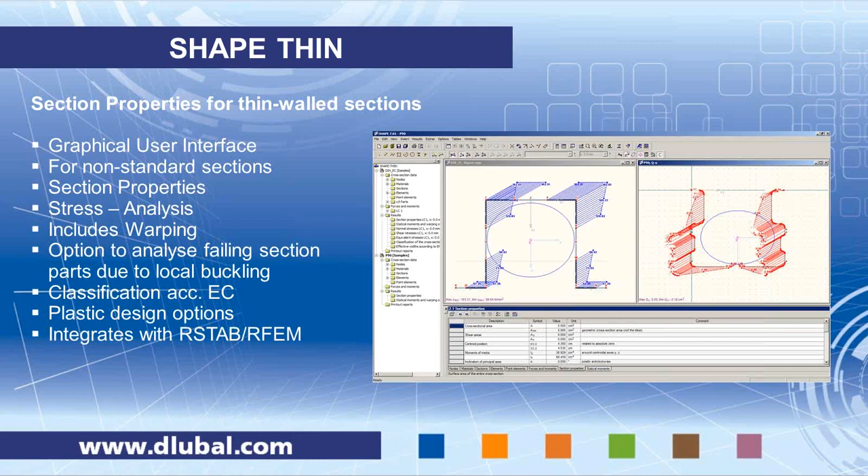ShapeThin also allows you to enter internal forces and to get stress analysis. It includes warping, and it's also capable of checking for local buckling and analyzing the failing section parts on a cross-section. It comes also with a classification according to Eurocode for general cross-sections, and it has plastic design options. It also is capable of importing internal forces from RSTAB, RFEM, or you can, as you like, manually enter some internal forces. We will see this module live, presented by Chelsea in a few minutes.

The second module that we are going to take a look at is RF-FE-LTB. It is meant to do buckling and lateral torsional buckling analysis according to second order theory. It's made from a 7 degree of freedom 1D finite element, which includes warping moments. In general, you find in the codes procedures how to check for stability for standard sections, like for an I section, but once it comes to a general section, there's not many regulations that you can use.

In general, you have to use a program like RF-FE-LTB, where you can set loads eccentric, and that includes the 7th degree of freedom, the warping degree of freedom, and with an imperfection and a theory second order analysis and a stress analysis at the end, you can check for the allowable or limiting stress, and if the critical load factor is smaller or larger than 1.

As I said, it works for all kinds of sections. It allows you to place loads eccentric. Also, it has the option to stabilize a section eccentrically, so you can arrange a support or a spring along the top flange, for example. And it does stability and stress analysis. We will also take a look at this module live.

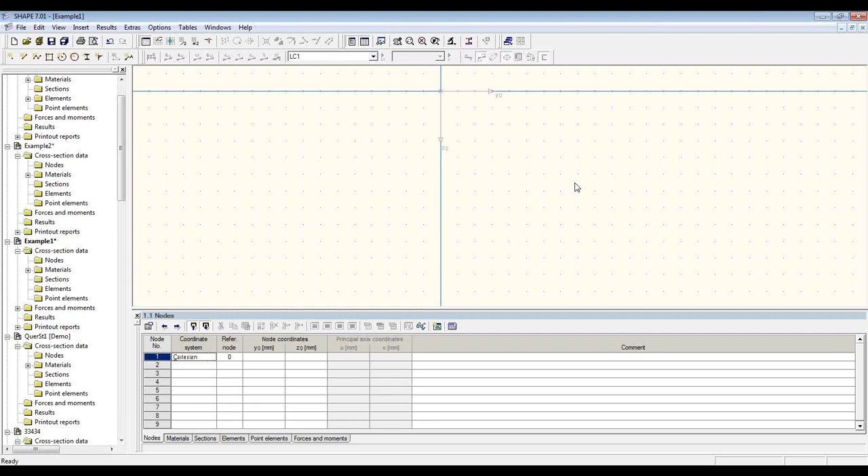Hello, everyone. Thank you once again for joining us today for this webinar. My contribution for today will be an introduction into ShapeThin by going through a couple of examples of modeling and analyzing non-standard sections. If you can see my screen now, I'm in ShapeThin, and the layout of the program is similar to RFEM in that you have a graphical window and workspace.

Below that are tables. To the left here we have a navigator, and at the top there is a toolbar with several tools for modeling and also for displaying the results. So in ShapeThin, when you are creating a new file, you have some options here in this dialog box.

First, you define the name of the section, which is also the file name, and you can also add a description, which will appear in the heading of the printout report.

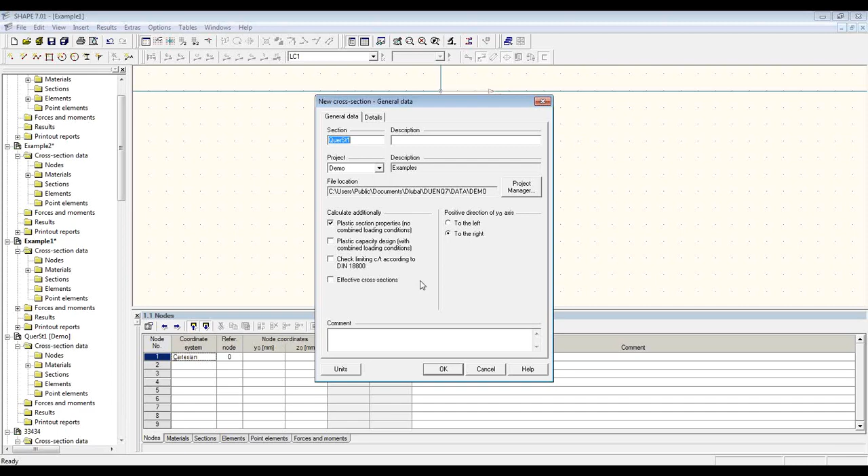Below here, you can see some options for calculation. Here you can define if you would like plastic section properties to be determined. You can also perform plastic design, check limiting ratios according to DIN, and also check or analyze the effective cross-sections. To the right here is just an option where you can define the direction of the global coordinate axis.

Okay, one last thing before I start with my example, I'd like to take a quick look at the project manager. This comes with ShapeThin and is a nice way for you to be able to quickly access and organize all of your files and previous sections that you've created. Here is a preview of my first example I will be creating, and here's a preview of the second one, so you can keep that in mind.

Okay, so getting started here, my first example will be demonstrating one of the ways in which you can create sections in this program, and I'll be making a built-up column section out of standard I sections and then modifying them. I will be creating an opening and modeling some welds.

So first I'll go ahead from the toolbar, open up the cross-section library, and here I can choose my I section for my first part of this. So I'm going to take an IPE 500.

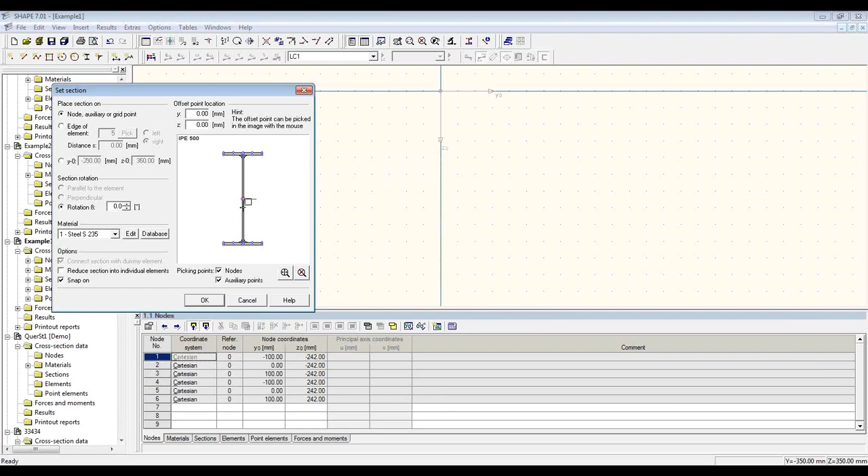And this dialog box that appears is what facilitates you placing the section. So since this is my first one, I can just go ahead and place it so that the top flange is at the center ordinate.

Okay, going back into my cross-section library, I can choose an HEA 220. And here I'll use this section, or this dialog box a little bit more. I want to define a rotation, as if you saw from the preview, I'll have a rotated I section attached to the web. And here is where I define which part of the section I'm deciding my placement by.

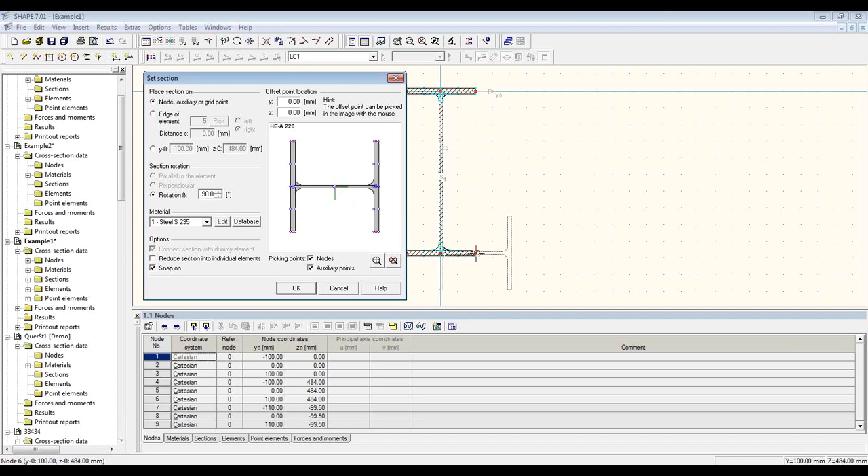So at the moment I have the center one selected, so if I go to the window and pick this node here, the center will be placed there. So first I want to go in and choose the one on the left side, and then, one moment.

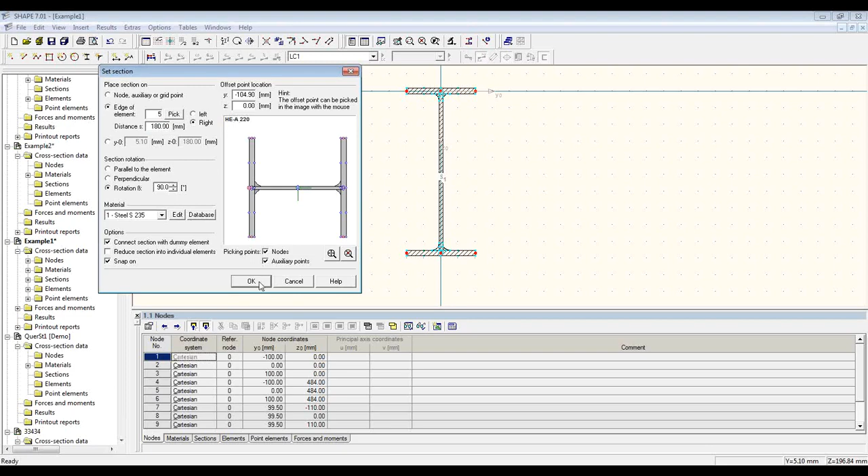Okay. I can go ahead and choose where it's going to be placed on the section that is already been placed. So here I pick the element that I want on the edge on the right side, and so there you can see it's locked on the right side of the web here. And I can just place it in anywhere, or I can select my distance from here. Okay, and hit OK, and there I have it placed.

So now I have two standard sections that can be selected independently. If I would like to show the section details, I can go ahead and display them from this dialog box if you need to reference that at any point.

Okay, so as I said, I'd like to make some modifications, add an opening. In order to do that, I need to be able to select these parts individually. So if I make the selection of the entire element, right-click, and select Reduce Section into Elements. Now I'll show you exactly, letting me know I have 5 elements and 4 point elements.

So here I'll go in, zoom in. You can see that each side of the flanges and the web each make their own element now independently, and the curved parts are point elements as well.

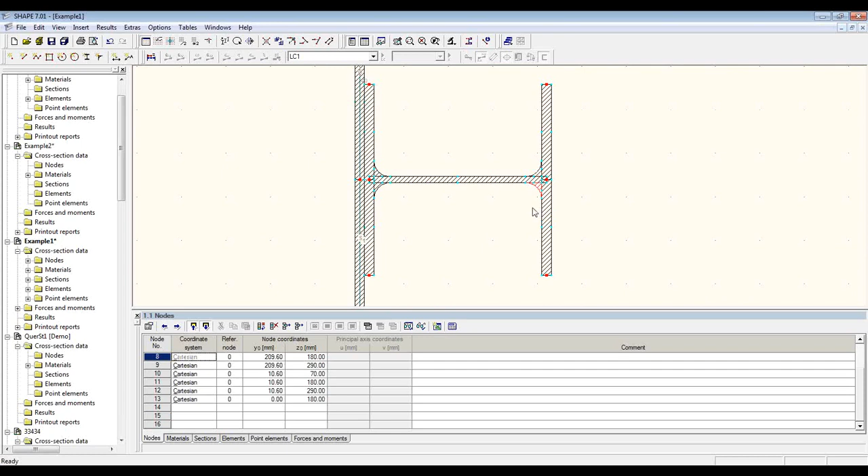So now I can select the web, right-click, and choose to insert an opening. So here, define my width of the opening. I want 30 millimeters, and its location. I want it to be 60 millimeters from the start of the element, which in this case is the right side. So apply, and I have an opening placed.

When an opening is defined, what is put in between is a rigid dummy element. And for our calculation, we have a value called the effective thickness, which is for the shear transfer. The recommended assumed thickness is the average of the thicknesses of the neighboring elements. So in this case, the web here is 7 millimeters, so I'll make the effective thickness 7 millimeters.

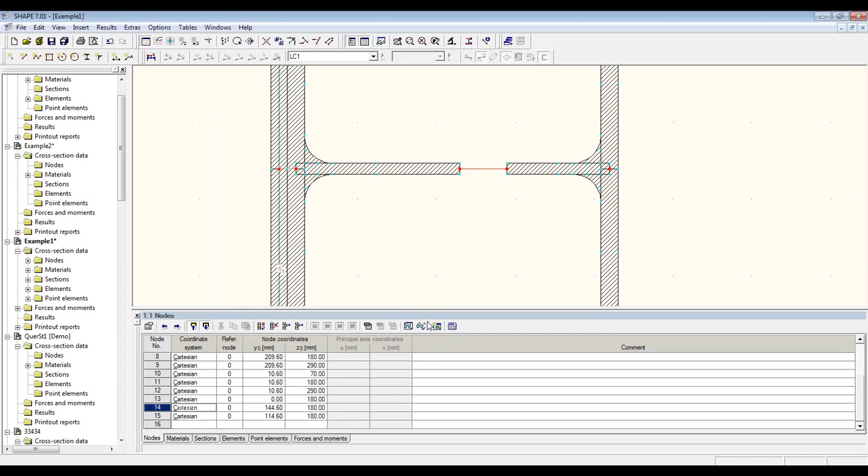Okay, so next I want to model a couple welds at this connection point at the top and bottom. So for that, I'll go back up to the toolbar and select a new point element. And this is ready to go.

I have my radius at 10 millimeters, and then I can select which node I want to place it at, and there I have my weld. If I go up to the top, I can make a rotation, negative 90 degrees, and place the top weld there. So now the area of this weld element will be included in the total cross-sectional area.

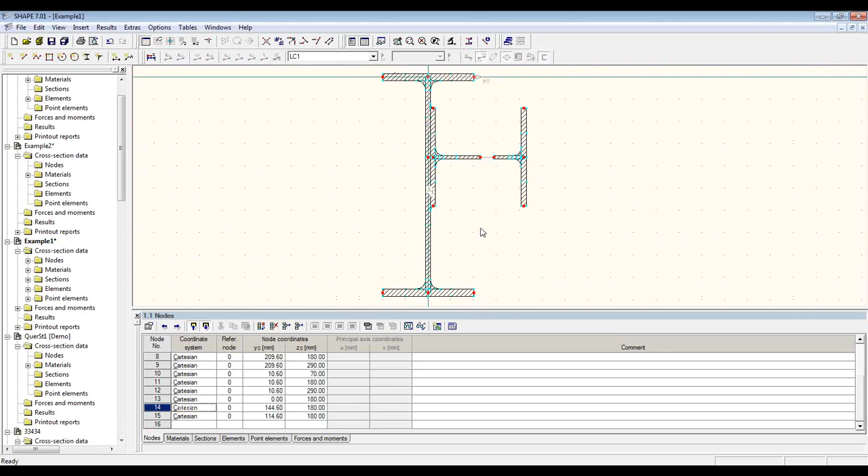Okay, so at this point I have all of my section modeled. What I can do before I do my calculation is a quick plausibility check. With this check, it will find if there are any errors, and if there are, it will tell you exactly what the problem is, so you know what to fix. So, plausibility check, no errors were detected. Okay, now we're ready to run our calculation and get our results.

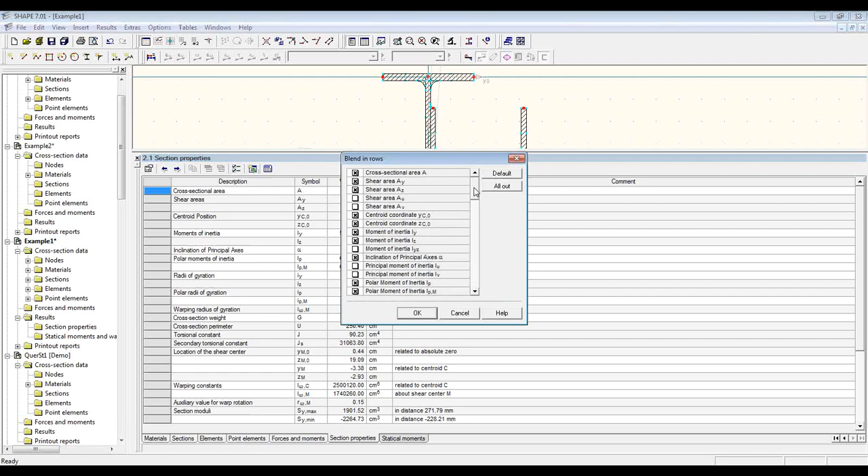Okay, so the first table you see here is the section properties, and here's a list of all the significant section properties that have been determined. You have your shear areas, cross-sectional area, position of the centroid, and so on. You can define what is included in this list by using a filter here, and you can include even more properties as well.

Okay, next table available is the statical moments. This is the numerical results, and these results are also included in your graphical layout. So I'm going to turn this back on, and you can see the statical moments in both directions, your normalized warping ordinate, and also your statical warping statical moment.

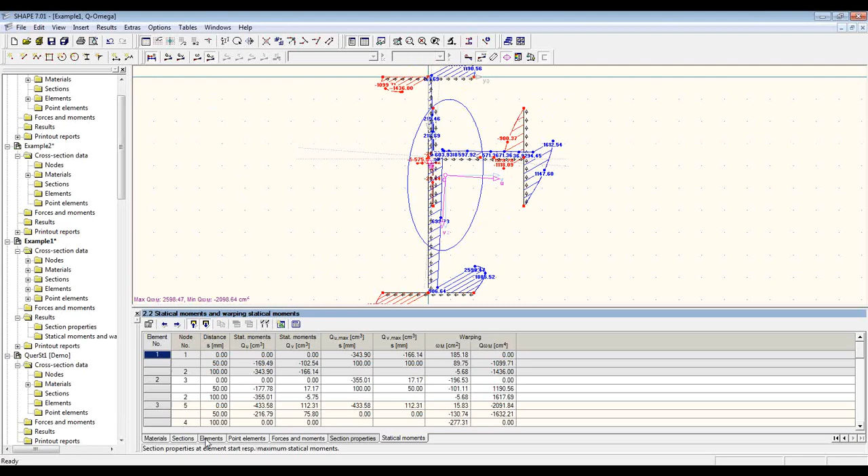One thing I'd also like to point out in the tables here, before you get to your results, you have a table for forces and moments, internal forces and moments, for if you want to perform a stress analysis. These values can be imported directly from RSTAB or RFEM, or they can be manually placed.

So I'll go ahead and just add a couple load cases just so you can see, at 0x location - you can do it at multiple x locations. I'll add a compression force of 80 kilonewtons, and then bending moments in both directions for the first load case. And then for my second load case, I will add a smaller axial force and then bending, in the opposite direction for my last bending.

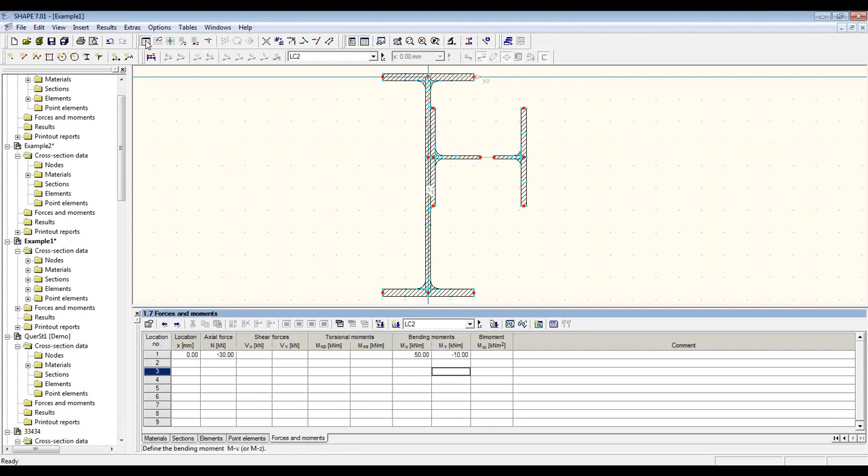Okay, and so now when I run my calculation, a few more tables appear here at the bottom, and here you see the values both in tabular form and graphical distributions. So I have my normal stresses, my shear stresses - there are none here, I didn't have any shear forces - and also your equivalent stresses.

So going back to my graphic here, I can include these images of the results in my printout report if I'd like. So I'll go ahead and send a picture of the equivalent stresses to the printout report, and set it at 50% of the page. And then send also the normal stresses, also at 50% of the page. And I'll open it on OK.

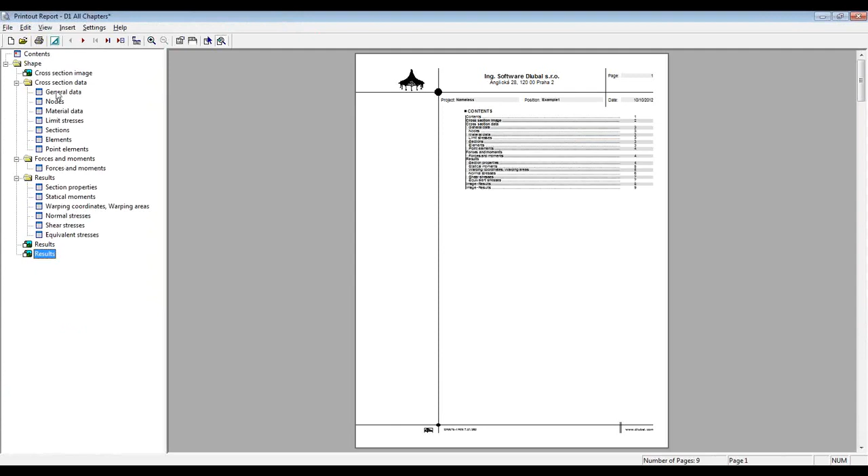And here we have our printout report, comes with the default setting. It has an image first, and then your tables of your input data and also your results in the same order as they appear in the program. Below you can see the images that were included. You can customize exactly what information you want to include in this dialog box, and you can reduce the amount of information that's included.

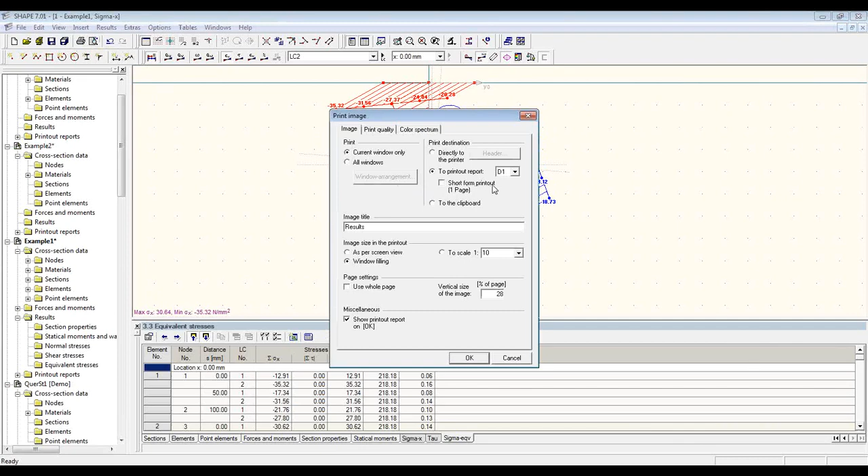Another nice feature of SHAPE-THIN is that for a quick summary of the section, your input data, and your section properties, there's an option to create a so-called short form printout. This is usually one page, and it's usually sent directly to the printer. But just to let you see what it is, I'll go ahead and append it to my document I already have. So this is the page here - it's a one-page sheet with an image of whatever you have displayed at the time you send the print, and a table with your input data and then your section properties that have been calculated. So that's nice to have.

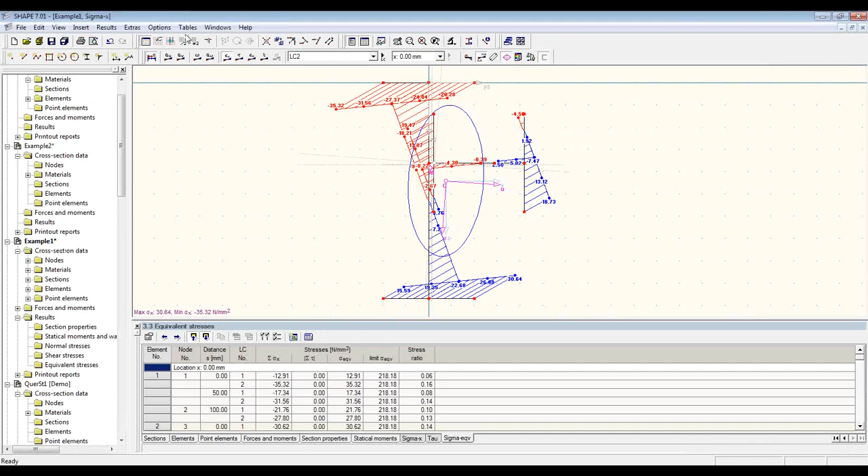Okay, so that's all for my first example. I'll go ahead and get started on my second example. If you remember from the quick preview I showed at the beginning, it's a symmetric section that will be used in a rain gutter system.

And so for this, I will just draw it in manually using the element tools in the toolbar. So to get started, here you define your grid, or your reference point in the grid. I'm working with a 2 centimeter grid spacing. Also define your thickness and material, and then you can just draw it in to the grid.

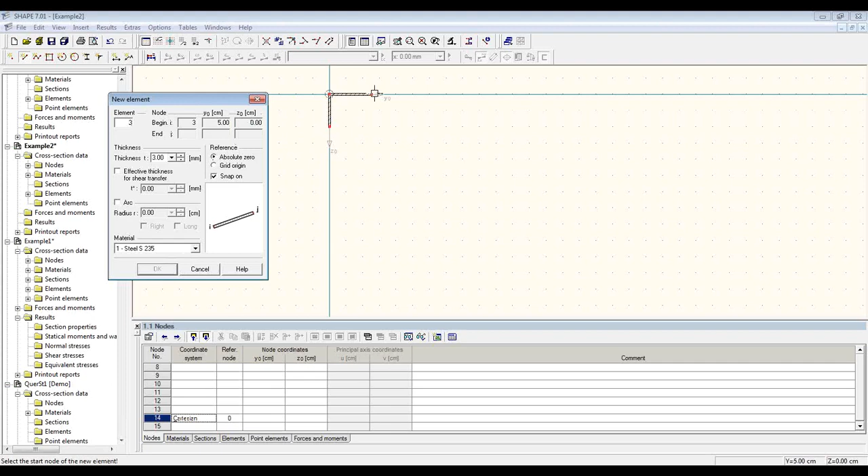My second line here, I want to be 5 centimeters, but because it's in between my grid spacing, it's easier just to type in 5 centimeters as the end node. So it appears, and I want to continue on from this node, but again it's between the grid spacing, so what will help is if I adjust my grid origin to be at this node. Now I can continue on directly from here.

I want the height to be 16 centimeters, and then the width of the trough to be 30. Because I have my reference, you can see in the dialog box my reference is at absolute 0. If I change it to the grid origin, so now this is the 0 line for Y, I can go ahead and place it at 30.

Since it's symmetric, I can just do manually half and then make a copy of the rest over. First, I'd like to shorten this line from 4 centimeters to 3. A quick way to do that is to go into the table, find that line, and adjust the coordinate that way. Now it's shortened, and I'm ready to select and make a copy.

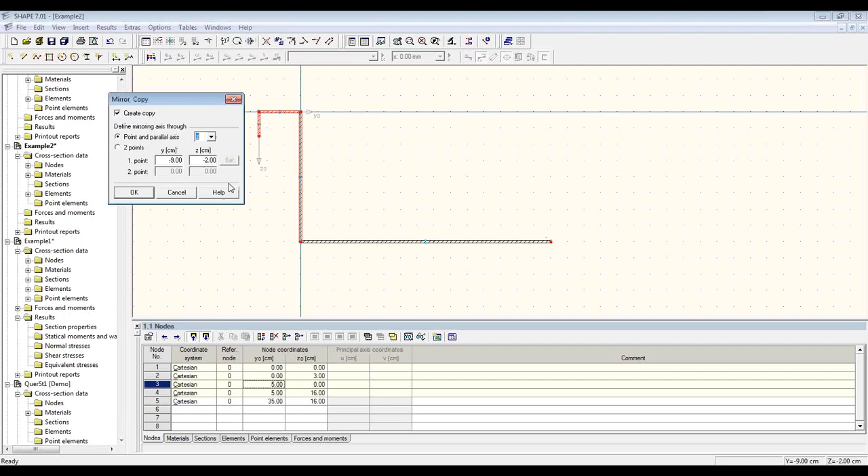Going to the toolbar, I have the mirror option. Create a copy through the Z axis, and select the center of this trough line that I have here. Okay, so just like that, I have my full section.

And I can go ahead and run the calculation. First, I'll just do a plausibility check to make sure I have all of my elements connecting. Everything is okay, and I can get my results.

Again, you see right away the table with the section properties, and your statical moments and warping constants there.

Another thing that is nice to include in your documentation is dimensions, an image of the dimensioned section. So I'll show you how you can do that quickly. I can turn off the view of my results and use the dimensioning tool here.

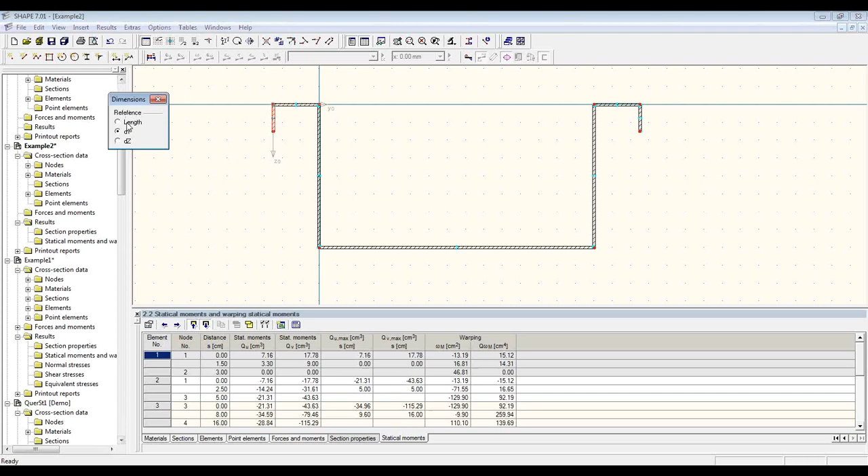Very quickly I can just select to show the heights of these lines and also do the horizontal lines. This is also a nice way to quickly make sure you've made all your lines the right length.

Here you can see, if you check the table, I believe I made... everything is okay, so I think I just made a bad selection with my... I can't select this, but here we go. I just made a bad selection for the dimensions, so let me just try that again.

Yes, everything is okay. And as I said, this can be included in your documentation, so I can just send this once again to the report. 50% is a good size for this type of image. And then there I have a dimensioned drawing of my section to include in the documentation.

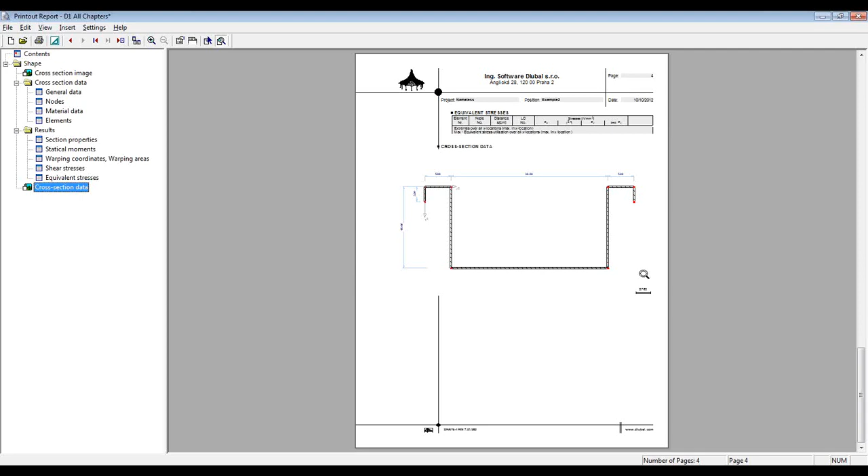Okay, so this is all that I had to show you regarding a couple different ways in which you can model in ShapeThin. It's also possible to import a DXF file to use as a template, so this is what Walter will cover, so I will save that for him.

Walter will also take you through a few more hints with working in ShapeThin and continue with the section on into RFEM and also present the module FE-LTB. So thank you very much for your attention, and I'll go ahead and let Walter continue from here.

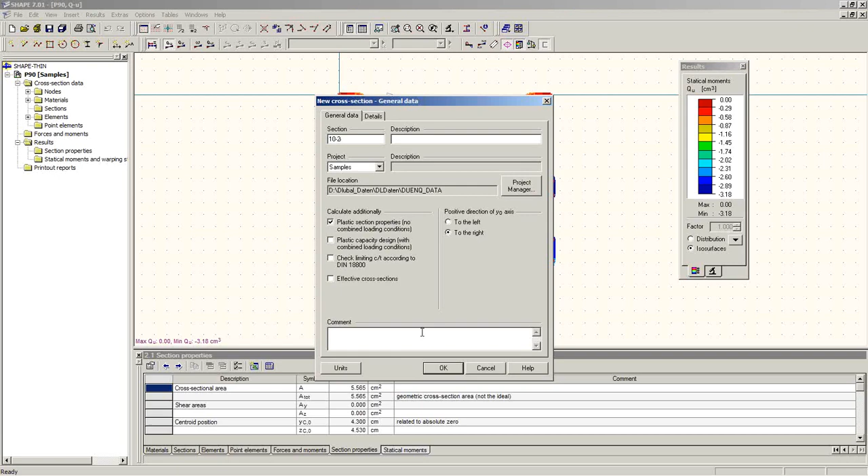If I want to import a template, I use the File menu, Load DXF Template. The DXF template can be from any DXF file. You find those files typically from the makers of such sections on the internet. You can download CAD templates, and I used one of those from a cold-formed purlin maker and saved it as a DXF file.

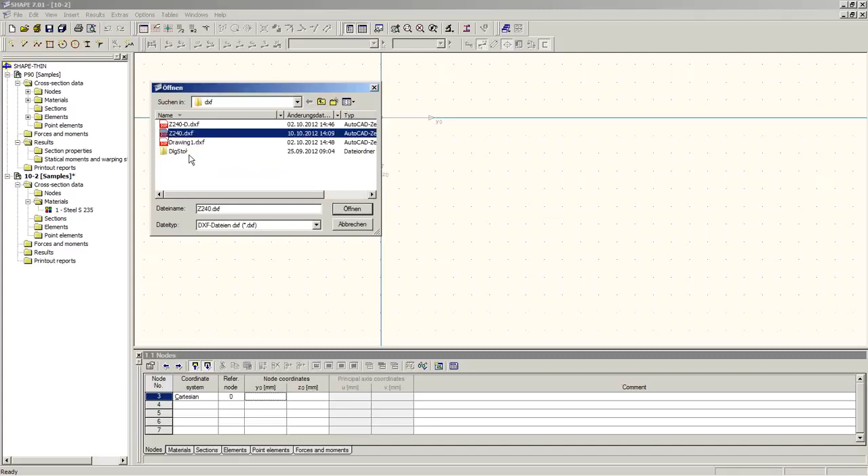Once I import it, I get a small preview dialog. I can first of all show and hide the different layers.

In those DXF files, typically there are all kinds of lines, texts, and explanations, and you have the option to select a certain layer where the information you like is located. I can also automatically assign to this layer or those elements a thickness that I enter in the text box, of 3 millimeters.

After that, I can grab the template at the center point origin and just drag and drop it into the main ShapeThin window. At the mouse click, I have here my complete structure already generated.

What I see here also is I have so-called arc elements. If I double click on it, I see the radius of those elements, the thickness, and so on. So it's just like a straight element, as Chelsea showed us, but there are also arc elements possible.

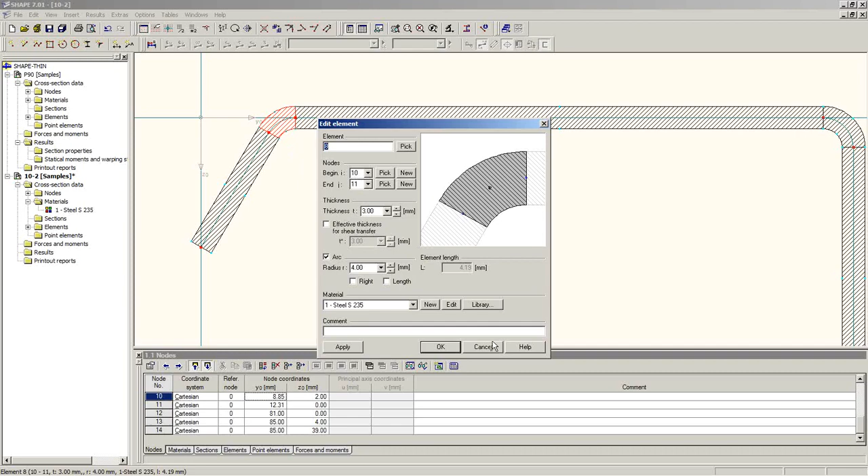In this model I had, there was an opening for bolts, and because I'm going to use this cross-section to model a three-dimensional, or 1D beam in 3 dimensions, I don't want to have this opening along my beam. So I close it here, because the bolt holes are typically only a local problem. I can just click and drag the nodes to the next connecting node, and it will automatically connect.

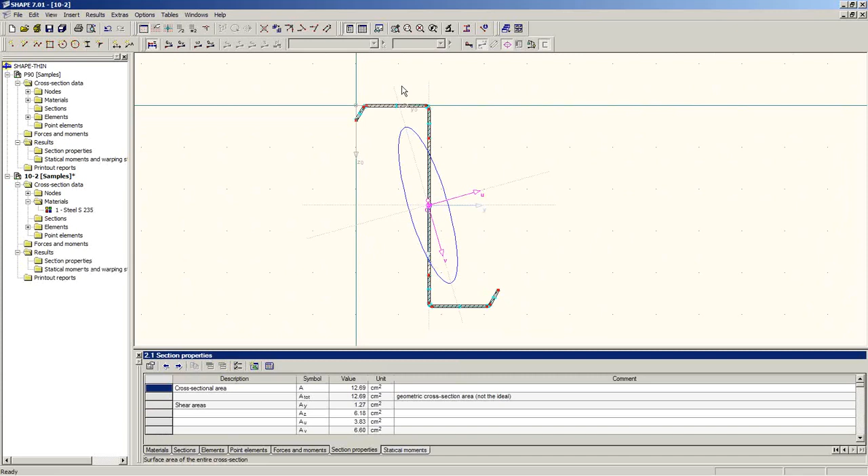My cross-section is then ready for analysis. I run the analysis and get the tabular information of the results, as Chelsea showed. Interesting for me are the section properties, and I can display them, for example, on the side of the window, and go through the graphical results by showing the different results here.

I notice here there is some little problem where I can close the tables — I don't like to see them here — where the flow of the diagram is not continuous. The sign of the result may depend on the orientation of the individual elements.

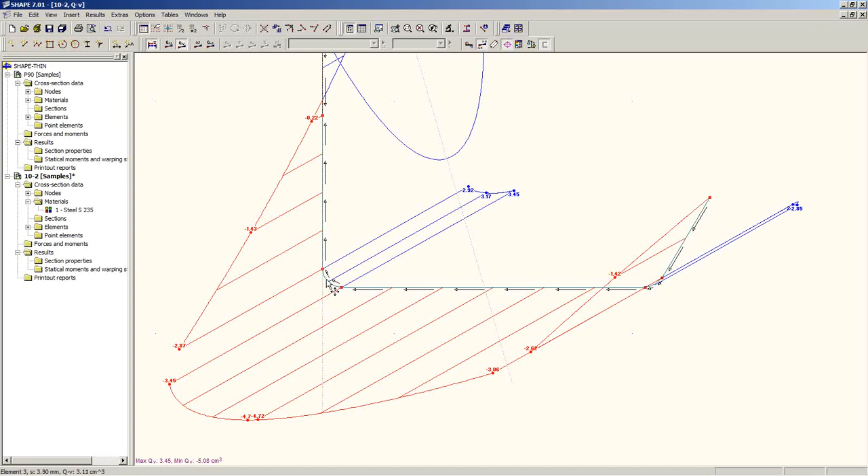So if that's the case, I can click on the element, right click, and use the command reverse direction. I do the same thing here because we had the same problem. Reverse direction. If I analyze the structure again, now I see there's a continuous flow of the results, and it forms a nice picture.

With this I also get, for example, the rotation of the principal axis. If I want to know how big that angle is, I can show the table, and there should be the inclination of principal axis, minus 15.87 degrees.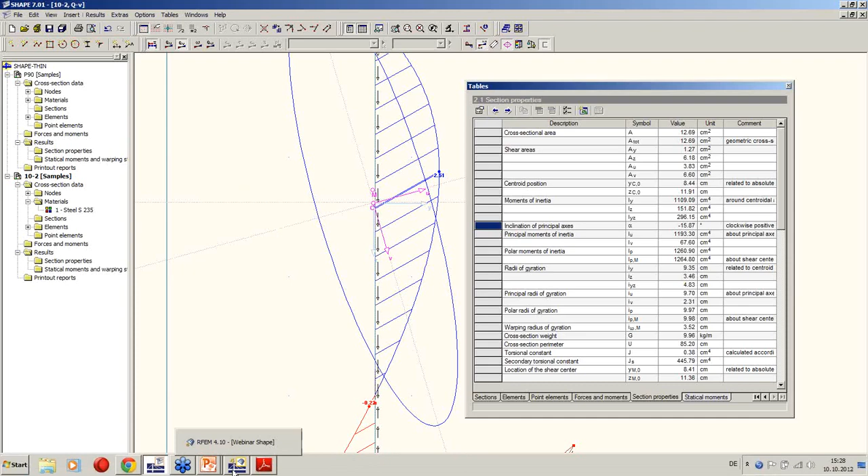I save the result in the file 10-2, and I go to RFEM. In RFEM I will also create a new structure. What you see here is the final result of what I'm going to do now.

It will be a 5-meter long beam with a linear load on top, and we will do an analysis of the critical load and show some tools you have inside RF-FE-LTB.

We start now a new structure inside RFEM, and I can call it sample 2, maybe. It's a 3D structure, and I can model it just as a regular structure that you might have seen in the previous webinars.

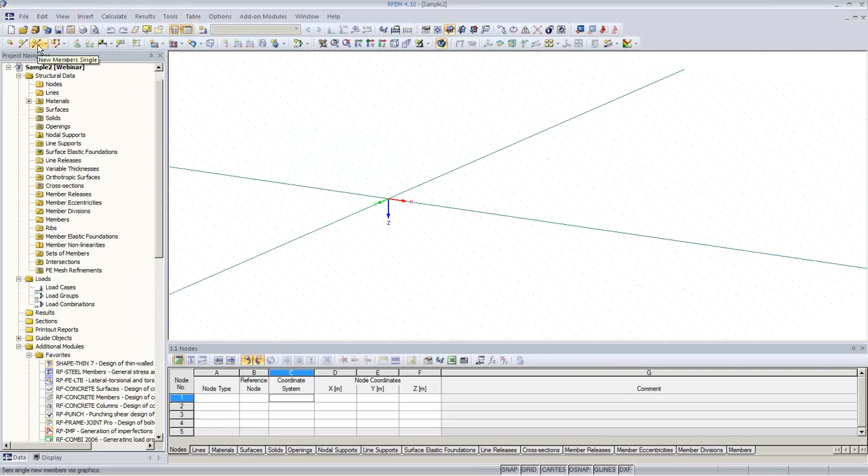I create a new member of type beam, and I create a new cross-section, and I choose it from the library.

In the library, or if I go back one time and choose the library here, then I see there are 2 buttons: cross-section programs, ShapeThin, and another one we have is ShapeMassive, which is for thick-walled cross-sections. I use ShapeThin here, and then I have the option to select my cross-section that I just made.

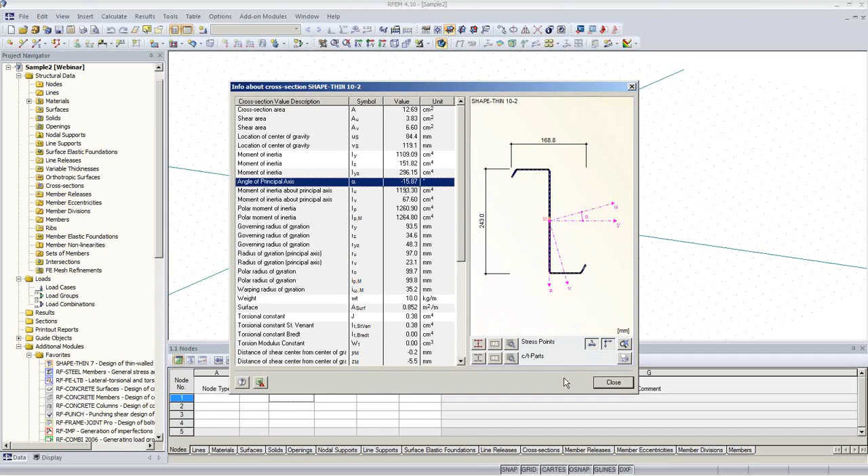It's 10-2. I can check also the sectional properties, and all the parts are here. It's like a regular integrated RFEM section. Also the angle is there, so most likely I picked the right one. Okay, material is steel.

A couple more OKs, and then I can just enter and select the grid lines and enter the member. It's now 5 meters. You see here, a nice feature is that the rendering is just like a standard library section, giving a very good visual impression.

If I don't want to see it, because it's hiding too many other parts of the structure, I can turn the rendered mode on and off.

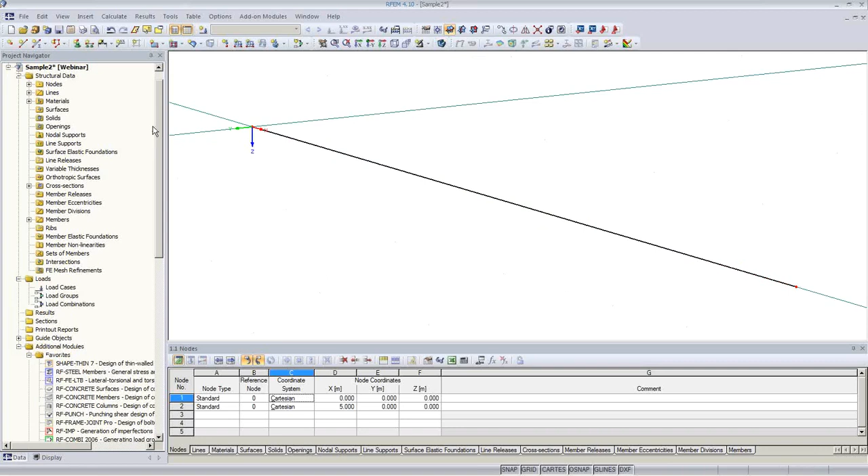I need some supports. I create a new nodal support, and I choose a support that is fixed in all 3 directions, and a restraint about the local longitudinal axis phi x. So on OK, I can enter the first node support.

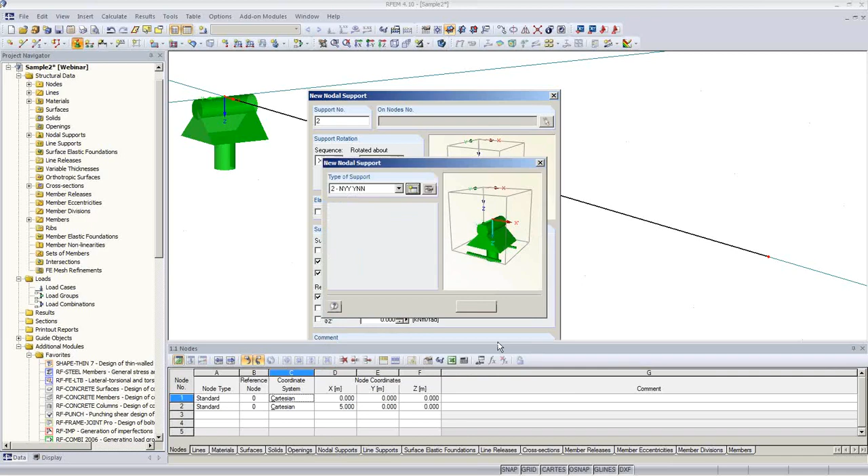I create another one and make it a fork type support again, but this time I release the fixation in the UX direction, and again the restraint about phi x. Okay.

This will give me a correct support condition where I can analyze the structure.

Next, I will create a load case. I call it full load. I disable self-weight because I will add the self-weight as an external load. Then I create a linear load, a new member load, global in Z direction, related to the true member length, and for now I choose 2 kilonewton per meter.

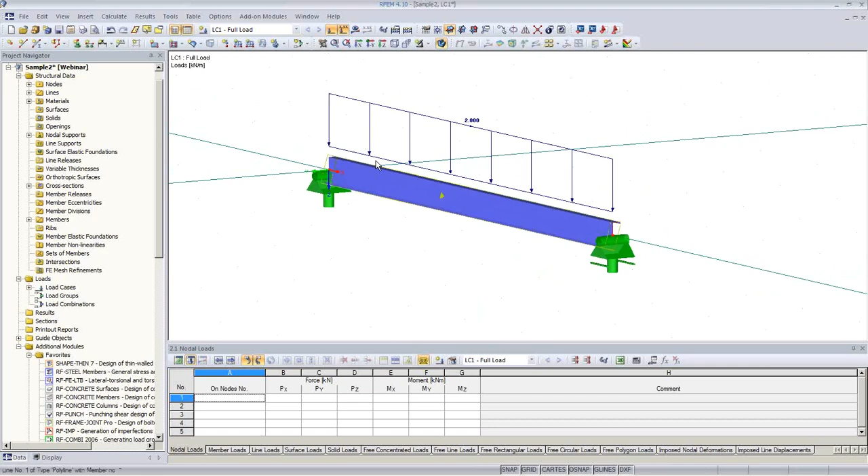With this I have a simple analytical system and I can run the analysis and get my results. I get deformation because we have a non-symmetric cross-section, so the deformation is not straight into direction Z. We also have bending moments in 2 directions.

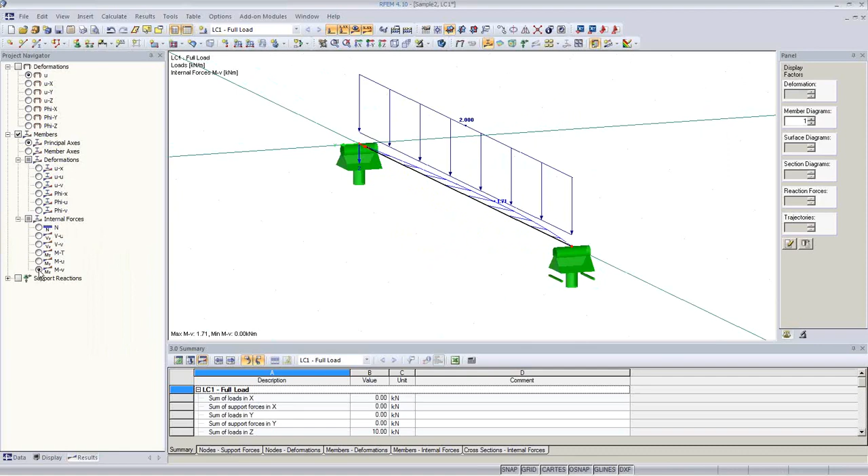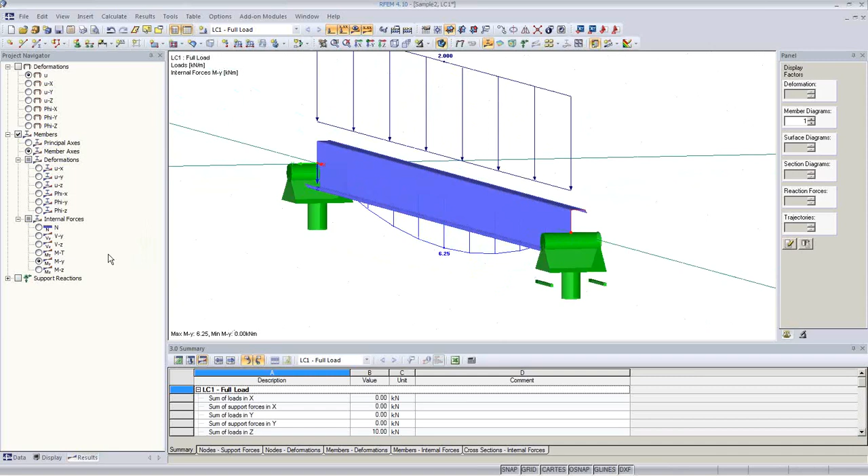If I show this, we have MU and MV. We now have the option to use in RFEM either the principal axis or the member axis for results. When we imported the shape thin cross-section, it was automatically rotated so the flanges were parallel to the main coordinate system. The main coordinate system is the global XY system, and the local XY system are in line by default, so I have to rotate it by the principal axis. But if I want to see the internal forces, I can switch them into both coordinate systems using these options here.

Next, I'm going to do a regular stress analysis with the steel member module for this beam, and I just want to run this load case. I have a utilization ratio of about 60%, and there is basically only plane loading for this member. Also the governing internal forces are only, for the global axis, MY and not MZ, but for the local, for the principal axis, of course it has 2 bending moments. Let's just remember this, we have a utilization ratio of about 60%.

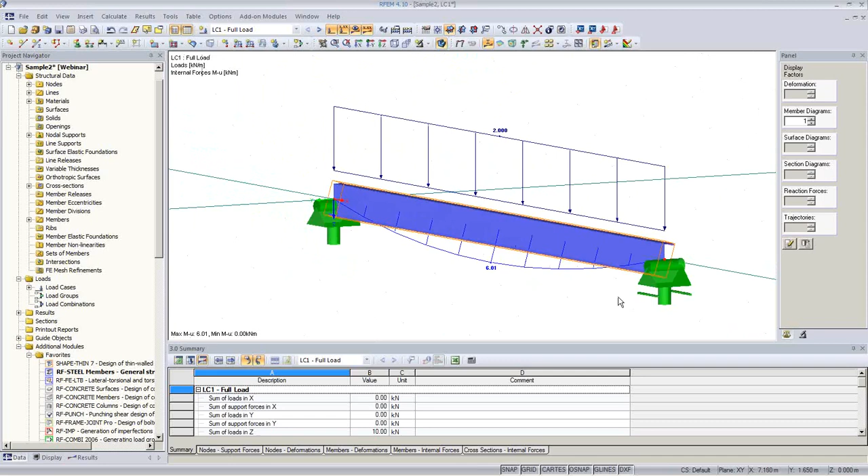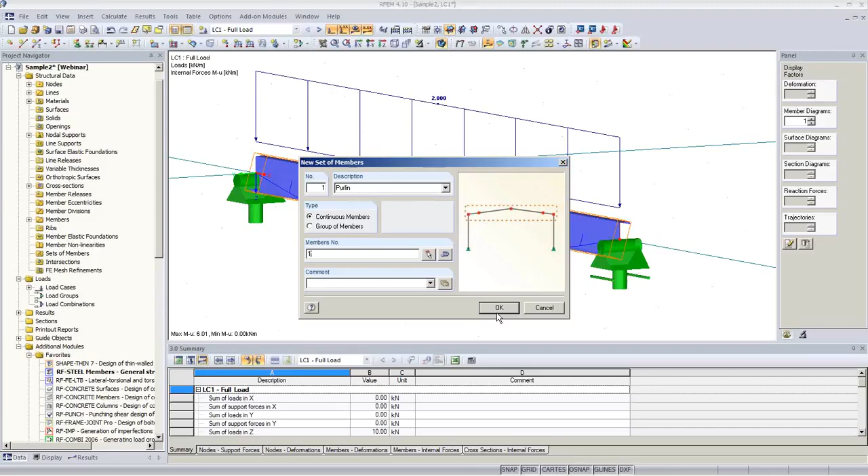So the topic is that we have to isolate part of the structure from a global RFEM model into RF-FE-LTB. The way we do this is by creating a so-called set of members, where I can group one or several members into one set of members and give it a name. Typically the situation is several linearly connected members combined into one set of members. Here I have only one member, so it's not so breathtaking, but I need this in order to work with RF-FE-LTB.

In RF-FE-LTB, I'm going to open it now. I can select those sets of members, and since I have only one, I can select all. It also automatically takes over the loads, so there's one load case, full load, and it takes over the materials and the cross sections. I have all the information here in this module.

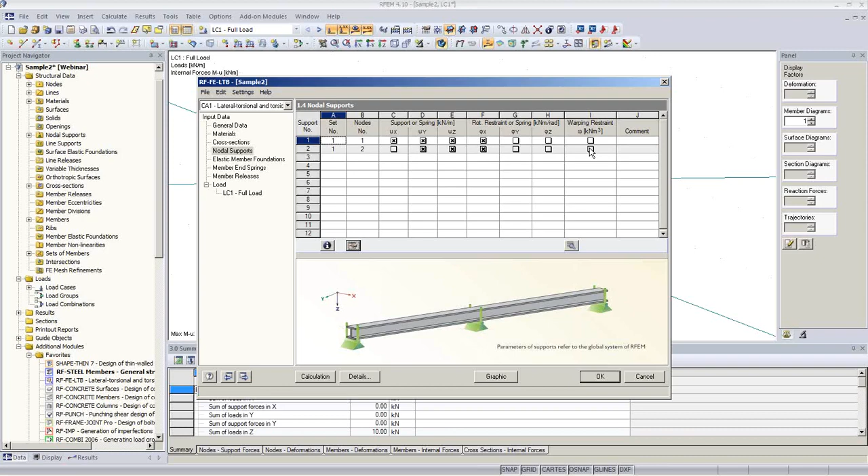And the nodal supports, as long as they are defined in the RFEM model, I can adjust and complete, because in RF-FE-LTB we also have the degree of freedom of warping, so there is also a warping restraint that I can address. The same thing applies to the elastic member foundation.

Here I have the option to add elastic restraints, and the special thing is I can give it an eccentricity. That means I can have a restraint on the top flange, on the bottom flange, or at one location along the beam. In RFEM itself, I can only have a restraint on a node, or if it's a linear support, on a line, but I cannot place it eccentrically.

The same applies to member end springs. On each member end, I can attach eccentric springs. For example, if I have only a discrete support somewhere along a continuous beam, I could do this.

I also can have releases in such structures, and again I have the warping degree of freedom here. The loads are also imported from RFEM. There are different load types and load distributions we can use, and if you click here you have the option to pick from the offers, load direction, and we have the 2 kilonewton per meter imported. Again we have the option to add an eccentricity, and this is very important if you deal with stability problems.

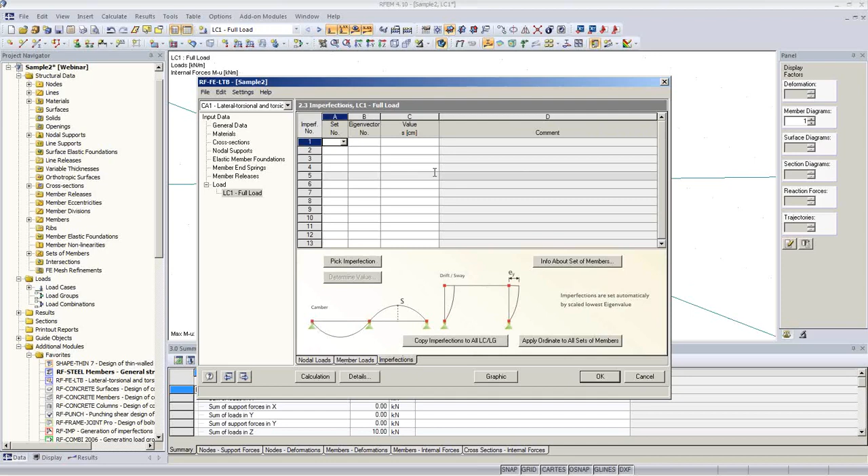I also have nodal loads and imperfections I can work with. I'd like to use the default settings and run the analysis.

What we get here is, again, just as in steel, a stress analysis. We have axial stress, shear stress, and equivalent stress. And now we also have utilization ratio, and you see the difference in the calculation. We have here almost a utilization ratio of 1.

And also as a result, we get the critical load factor. We get 1.71 as the critical load factor.

If we want to have a stability check according to theory of second order, we need to have an imperfection, and we need a stress check with a utilization ratio smaller than 1, and a critical load factor bigger than 1. And then with this we can check for stability.

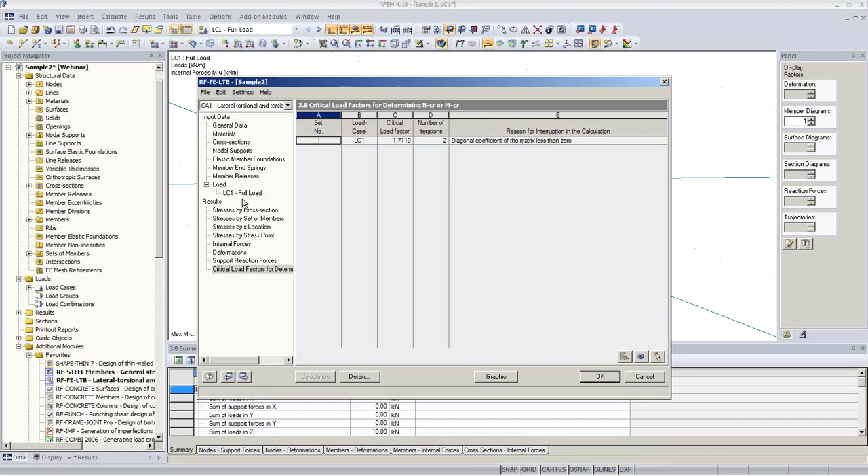So without any changes from RFEM, I get those results. We can take a look at the graphical results.

For example, here we can look at the deformation, and we can show this a little bit better. If we go to the display tree and check deformations, we can have cross-section colored, and get this nice display where we can also increase the deformation a little bit, and see what happens to these cross sections.

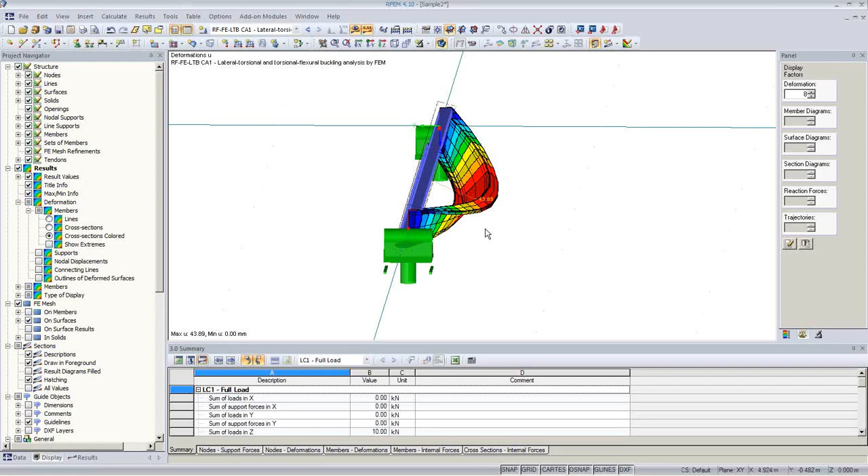So because of the unsymmetry, it's a combination of horizontal and vertical deformation. You can see the top flange is moving sideways and causing all the other internal forces.

Of course, so we can also take a look at the results. So we have some small axial forces, we have the shear forces in both directions, we have also torsion that we don't have in RFEM.

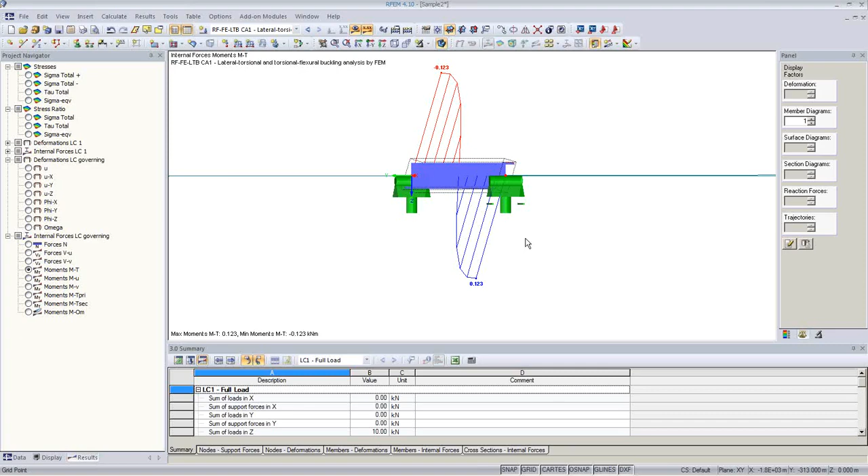Because in RFEM the crosswise loads are always in the shear center. And so if we have only global loading, global load direction, there will be no torsion. But in this module, our RF-FE-LTB, all those effects are implemented. We have primary and secondary torsion, and also we have a warping moment.

Now we want to go back to our RF-FE-LTB and continue with our stability check. I'm going next, and put the load eccentrically.

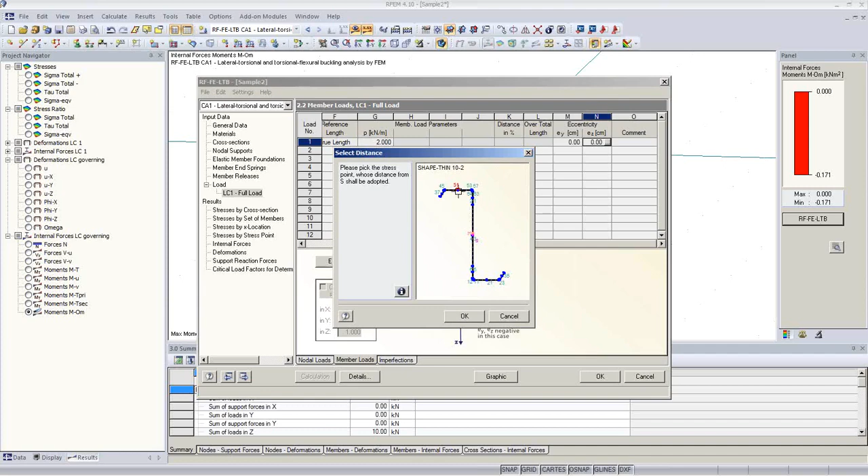So I put it on top because most typically the load is imposed on the top of the cross section via maybe a steel deck and so on. So if I pick the eccentricity, I know now exactly where my load application will take place.

If I run the analysis again, the eccentricity has a very negative effect. You see the stresses increase because the internal forces change, and also the critical load factor drops a little bit.

Okay, what can I do now? We saw that the deformation was a combined deformation from rotation and horizontal movement. If I'm able to restrain this horizontal movement or this rotation, I will have a very good effect, I think. So this is what I'm trying to do now.

I'm going to the member elastic foundation. I select my first set of members, and now I can enter all the spring constants for those restraints and also the eccentricity, but typically I don't know those springs. So we implemented a tool that gives you the ability to calculate such springs.

In this tool you can select what type of restraint you have, whether it is a lateral or rotational restraint. Lateral restraints typically would be trapezoidal sheet. Of course, if you apply such restraints, you also have to make sure that, for example, the steel deck is able to handle those stabilization loads from the restraint.

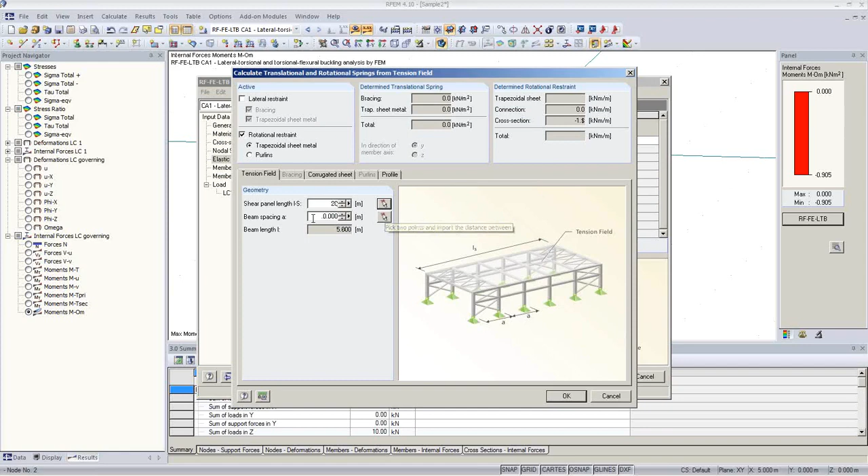I can either pick it. If I have a building, I can pick 2 nodes. In this case I don't have that, so I just assume here maybe it's 20 meters. The beam spacing should be 1.5 meter.

The steel deck should be from a corrugated sheet, and I pick there - there comes a nice library from some provider, some steel deck, maybe something like this. Okay, all the parameters, effective stiffness of the steel deck are imported.

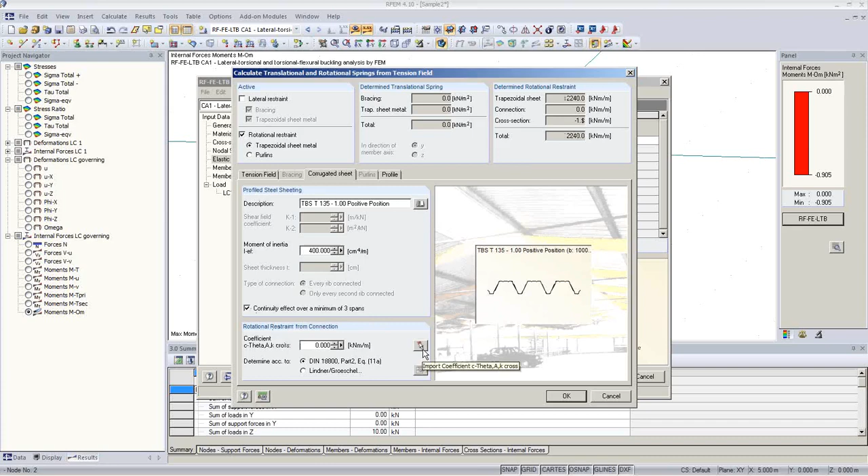If it is a continuous beam type of mounting of the corrugated sheet, I can also take this into account. Also the rotational restraint from a connection can be taken into account, and there's a table from DIN that gives you parameters depending on how many bolts you use to fix this steel deck. The bolt spacing should be...

Bolts should be in every rib of the corrugated sheet. The last part is the rotational stiffness of the cross section itself. There are formulas that can be used, but they are only valid for I and channel sections, so this time I just ignore them.

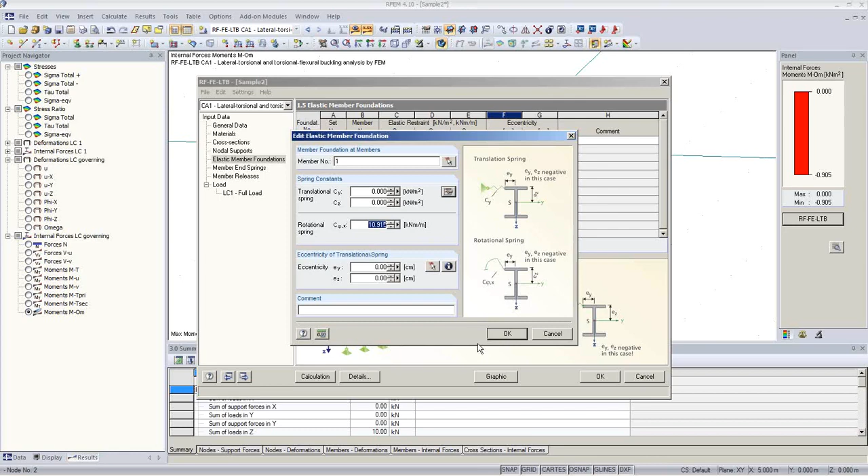With this information, we analyze the spring constant for a rotational spring, and it's already written in this input box. On OK, it will be transferred to the table here. Next, I'm going to select the eccentricity and say this rotational restraint should act on top of the cross-section as well.

To make the analysis of second order, stability analysis according to second order complete, we need to apply an imperfection. This is the last thing I'm going to do. There's an imperfection tab that I can select. In this case, you might be able to know what the shape will be for an imperfection, whether it's cambering, sway, or inclination.

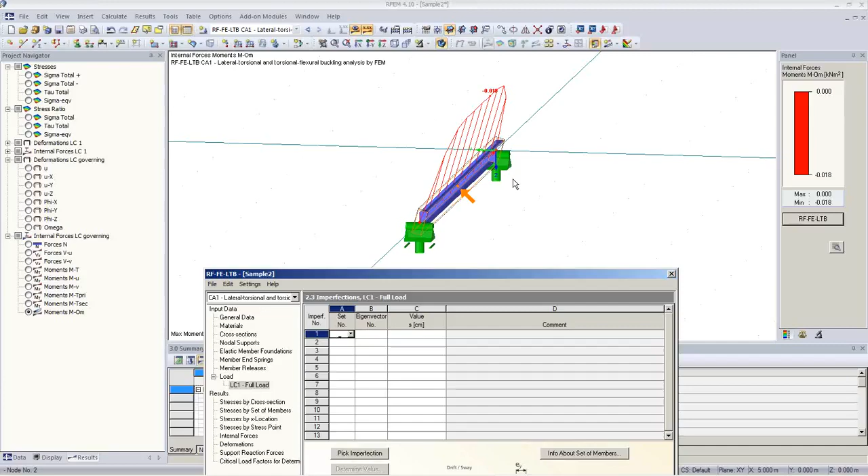But if it's a 3D frame structure, you might not know how the imperfection really looks. It has to be according to the first buckling shape. In most codes it's regulated this way.

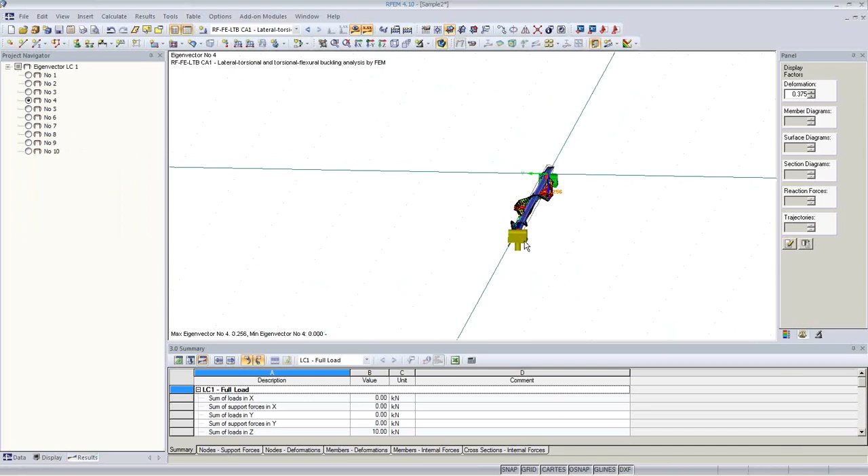RF-FE-LTB has the option to analyze several eigenvectors, and I can pick the imperfection graphically. That means I can analyze several eigenvectors and take a look at them graphically. If it's too much of a distortion, I can change them, change the magnification factor, and you can see here the typical failing modes of such a beam.

I will choose in this case eigenvector number 2, which is the cambering that I want to have, and the horizontal part of this imperfection shape will be applied to the structure. So I have this graphical view, which is very important to see what type of imperfection I'm selecting.

I go back to RF-FE-LTB, and now I need the scaling value for this imperfection. I need the pitch value basically of the imperfection. Typically it is length divided by 200, so in this case it would be 2.5 centimeters. There might be different values you find in different codes, but Eurocode, for example, gives you hints in there.

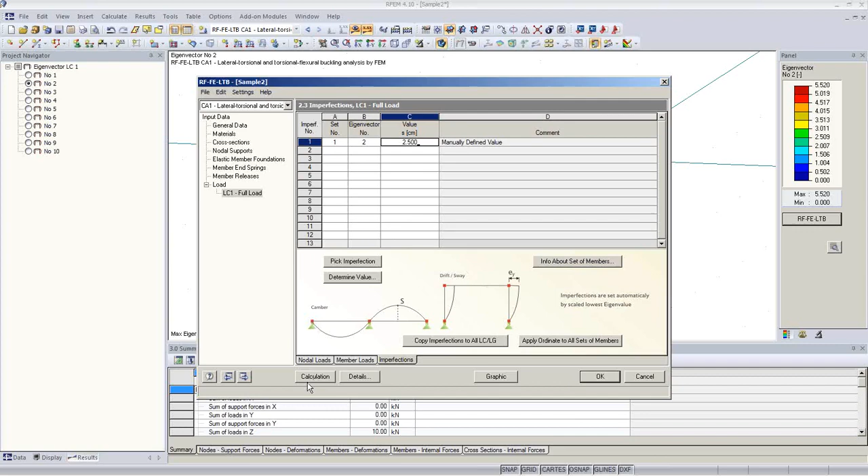With this imperfection, I run the analysis again, and I have slightly higher stresses, and my critical load factor may be increased a little bit from 6.22 to 6.28. But after all, my stress check is okay, critical load factor is greater than 1, and all my results are fine.

You see here there's different tables, stresses by cross-section, set of member X location, internal forces, so you can check all your structures, you get the deformations in numerical way, you get your rotation values here, you also have the support reactions. Also, a good information is the twisting moment at the end from the imperfection, for example, that might be necessary to be taken over by the supporting structure for this purlin.

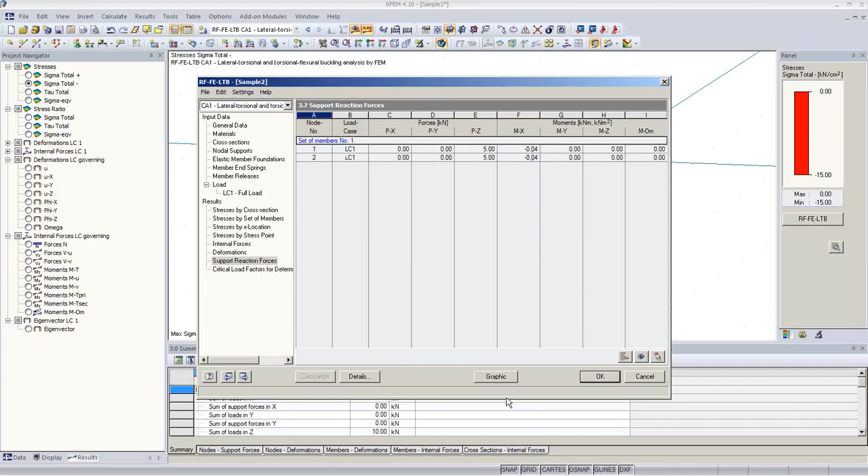We can take a look at it also graphically. We have in our RF-FE-LTB a different navigator for results: sigma total, sigma positive negative value, or the sigma equivalent value, and we can use the stress ratio, so 63%. We can also show the deformations, and you can see this horizontal restraint due to our rotational spring is doing a good job, and it's helping to stabilize this structure.

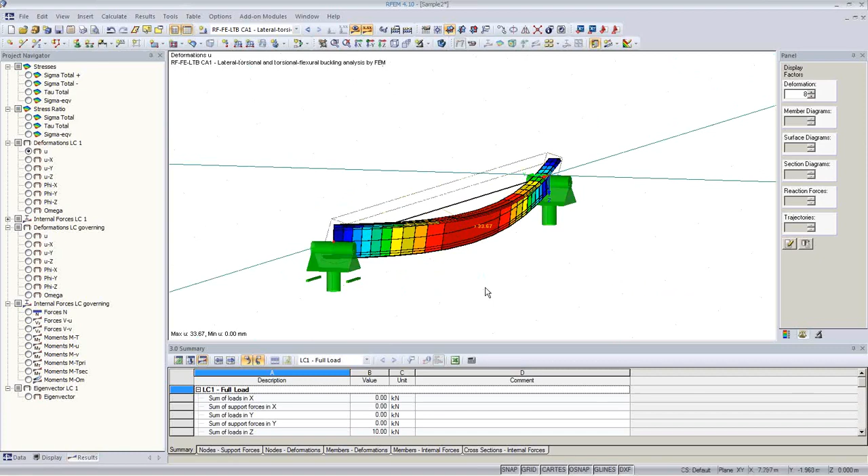Before we go over to some questions, I'd like to do some documentation of RF-FE-LTB. I print this structure, this figure here, to the printout report. I want to do it window filling, I want to have it on 50% of a page. When I do it first, I have to open the printout report one time, and it gives me a chance to show you what is in there. So here we have this graphic.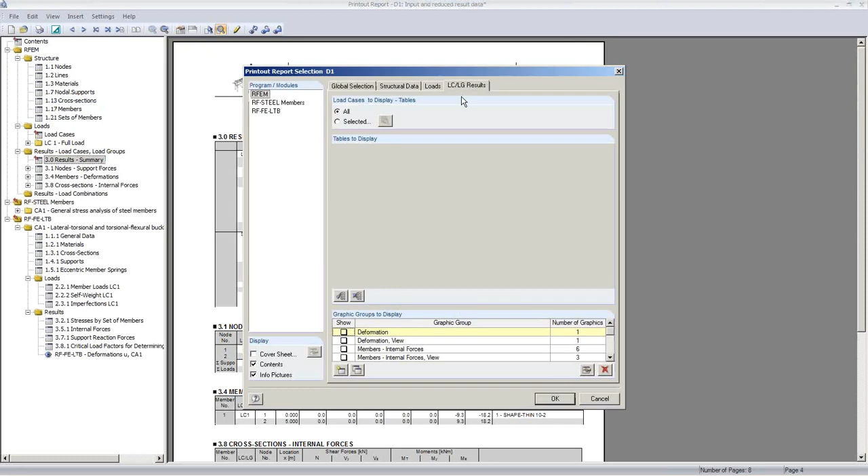RF-FE-LTB has the regular tables here. You can flip through and zoom in, and you have the option to select what you want in your printout report. There's an extra chapter for RF-FE-LTB that gives you all the results we just saw manually in the module itself, so you find all those tables again, with the eccentricities, all the stresses, and all the internal forces as tables.

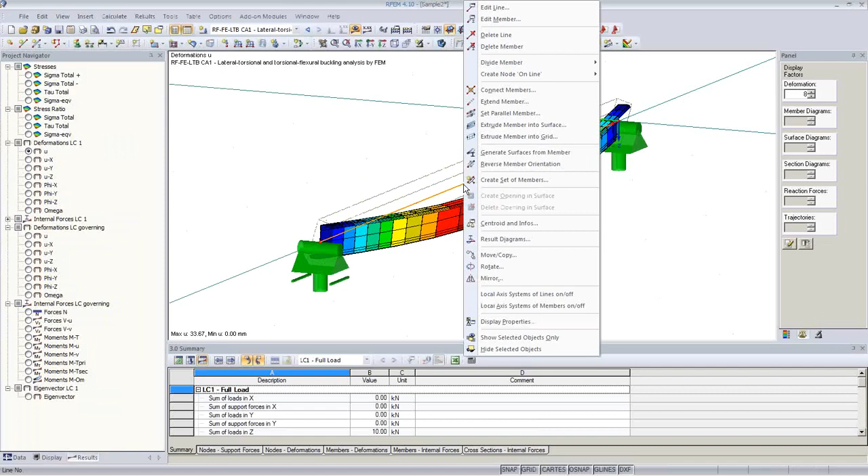There's one more nice thing I'd like to show you. You can right-click on the structure and get a result diagram. If you are in the RF-FE-LTB results, you can check out a few things, for example the equivalent stress, then the global deformation, then the internal forces N, the shear forces, torsional moments, local, primary, secondary, bending moments, and so on. Everything is nicely arranged in one line under each other.

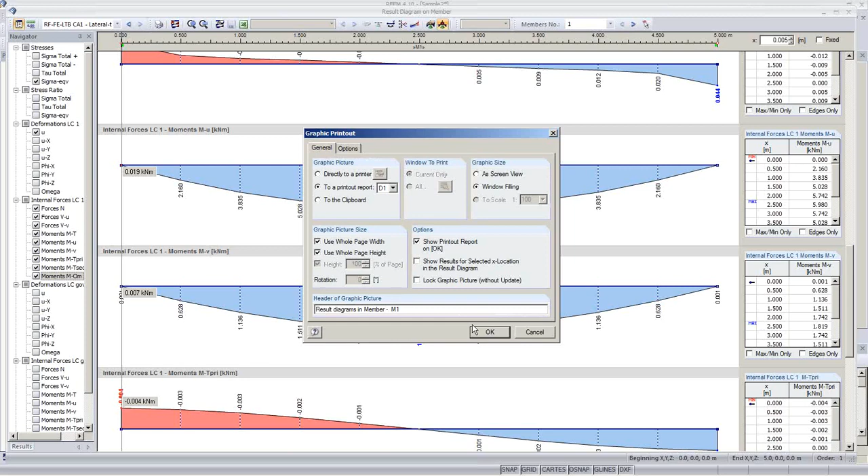You can scroll here if you like, and you can print this to the printout report. This is a nice document of all those internal forces, and you can check everything graphically in the printout report. Anytime something changes, the printout report will be automatically updated, so it's always actual in this way.

Okay, this completes my presentation, and I think it's time now to take a look at some questions.

And I see, let me read what is here. Okay, it takes me a little bit because I have to first check out what is in there. Okay, there is one. Well, there's one in German, I have to translate it.

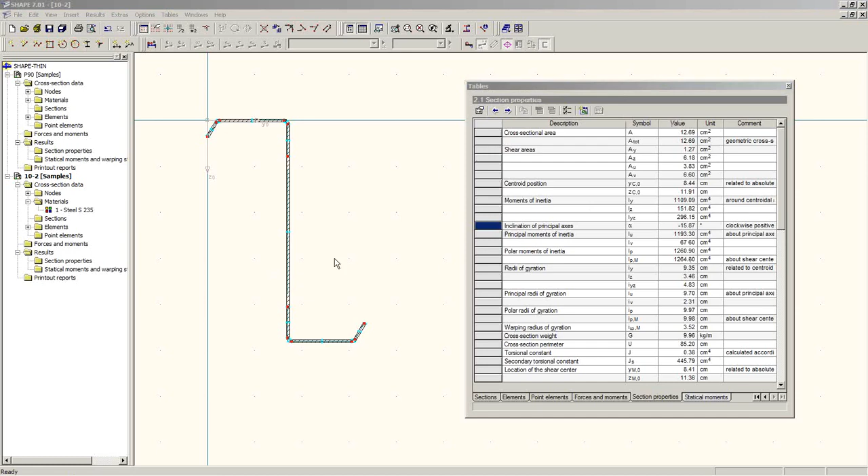One question is, what about the B to T relation of this thin structure? How can we check this? It's a question related to Shape Thin. I go back to Shape Thin. You have the option to change or to take a look at the width thickness ratios only if you use a certain setting. I go to general data, and then you can check here, check limiting C to T values according to DIN.

And if you go to the C to T parts, then you can also check the rule: elastic-elastic, plastic-plastic, plastic. If I do this, or just leave it here, and analyze it, I run the analysis again and take a look at my tables.

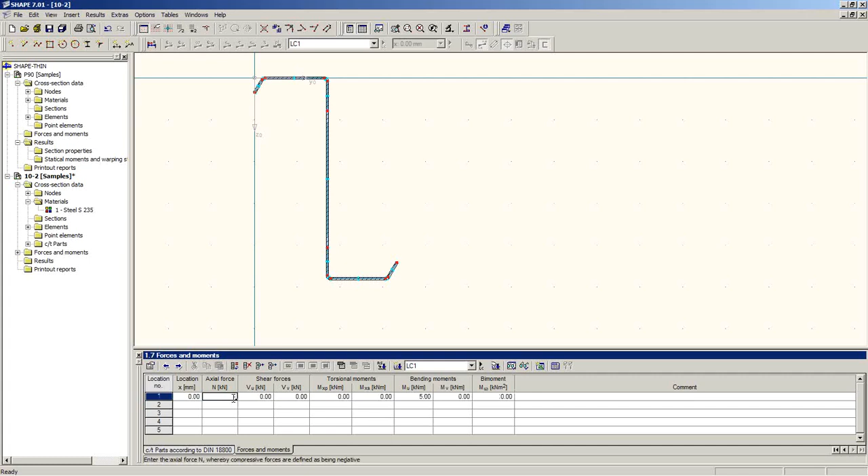And of course for this I need internal forces. So I check here some internal forces, maybe a bending moment, 5, maybe an axial load. And if I run the analysis again, I get a c/t value check.

And you see here, actually for each element, the restraint type, if it's supported at both sides. You see the stresses, and you see the allowable and the limiting c/t value, and the utilization ratio, basically.

This is according to DIN, and it's also possible according to Eurocode, but it's a different setting: plastic effective cross sections.

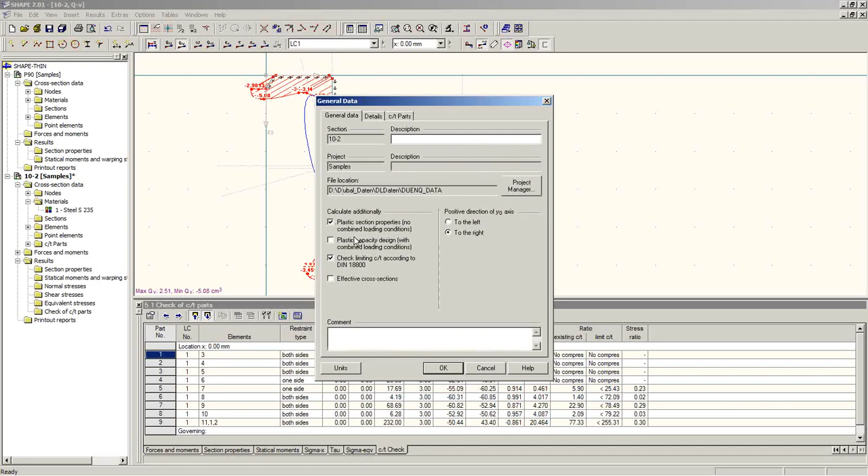Here we go. If I check the effective cross sections, then I can use, for example, also Eurocode. And if I do this again...

I have here also the cross section classification according to Eurocode. It leaves out the curved elements, because classification for curved elements is not part of Eurocode, so we don't know how to do it, and it's a limitation. But what you see here, the blue lines are the local buckling parts, and the support condition and so on is all here again. And then at the end you get a classification that we can take a look at.

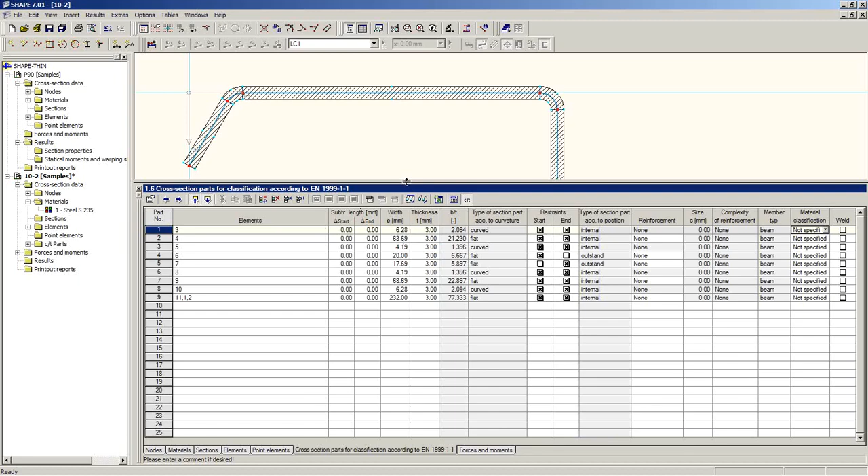Material... oh okay, the problem is I didn't choose a Eurocode material, but if we had done this, I would have gotten a classification also for Eurocode, and it's possible to do this classification in Eurocode. I will send you this picture with the classification, or maybe I can use another file.

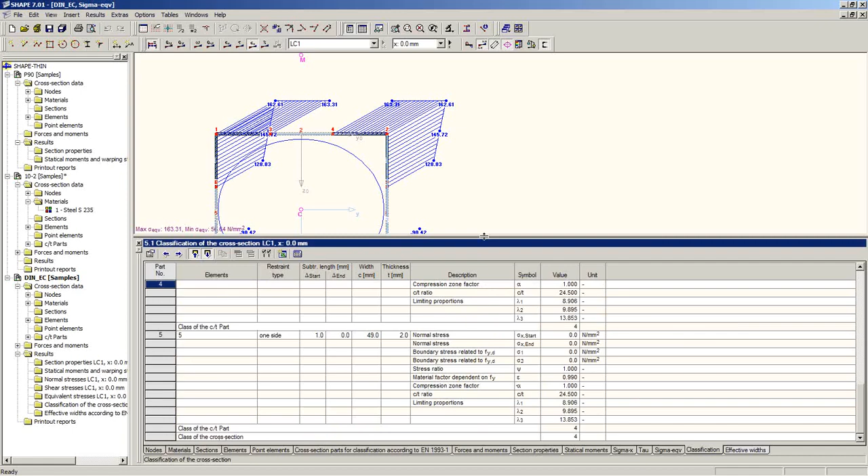In this classification, we get here all the parts for each element. If I click here, for example, it jumps right away to the right table. You get the c/t ratio and all the internal parts and the final class. So if it's class 4, the class of the cross-section will also be class 4. And if I work with effective width, I get a stress analysis only with the effective width in this type of analysis. So I hope this question was answered.

Is it possible to make a database of sections? For example, a supplier has 20 types of profiles. Yes, you can do this.

You create them inside ShapeThin, and you take them over to RFEM. In RFEM, if you type them in the table, for example in the cross-section input table, you will be able to read this cross-section. You have to know how it's named, but it will automatically recognize it.

When I import the cross-section from ShapeThin, it automatically becomes part of the user-defined cross-section library in RFEM, and each cross-section is also stored inside the RFEM file. So if you send an RFEM file with a ShapeThin cross-section, it will also be available for the user in the other RFEM license. Okay, this was this question.

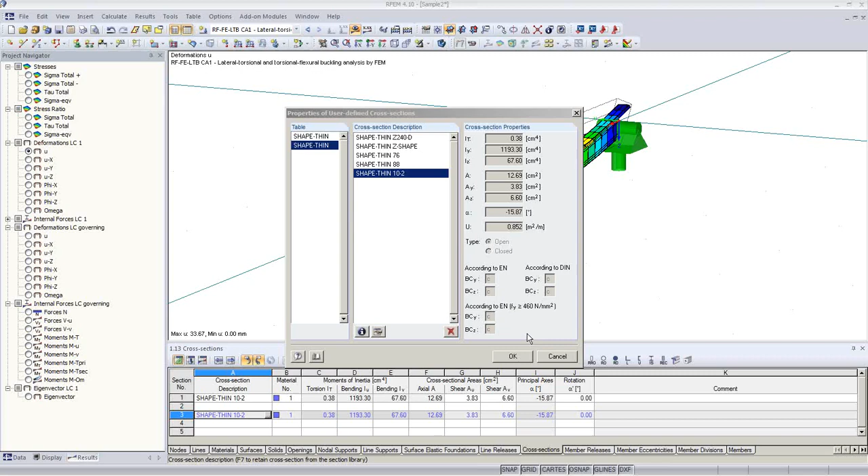Printing to an RTF file: typically you can export each protocol to RTF. So, File, Export to RTF file - or VC Master, there's another program that uses RTF files. You can export it to an RTF file and then you have basically a Word format, which is unformatted, and you can use it for any other purpose, change it, and add your own headers and your own graphs as you like.

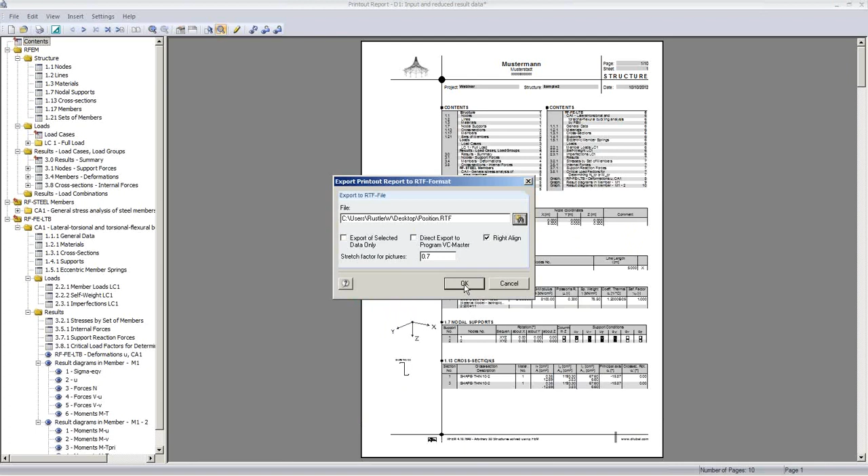And of course, you can also copy and paste into this file. So for example, let me try it - I haven't tried it for a long time. File, Export to RTF, position RTF. Maybe I put it to the desktop so I can find it quickly.

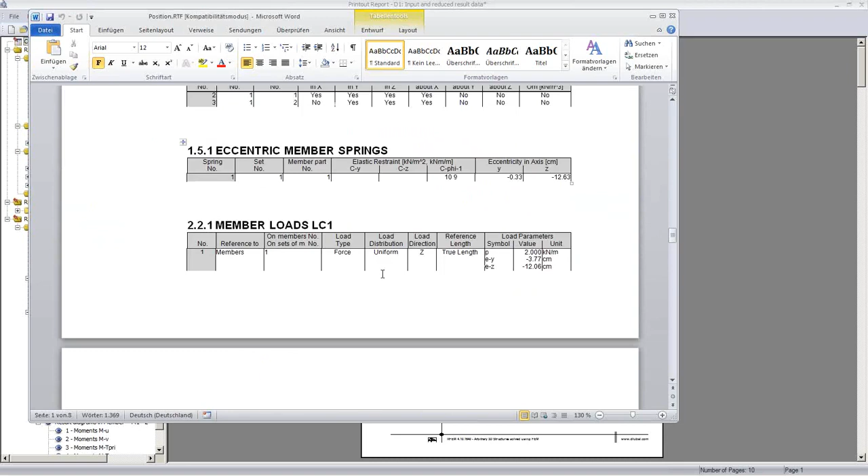Now there's a file, position RTF. I can open it in my Word, and I have here the tables all nicely arranged in my Word document. And then you can enter your own header and your own things, and there should also be some graphics which you can use.

Of course, what you can also do is copy and paste any graphic that you have here. If you want to copy and paste those graphics, you can say Control C, and you can also say Control V, and you will have the graphic here, what you have on your screen, depending on the size of your workspace and so on. So it's all working like in any other Windows application.

Okay, let's see what else of questions we have.

There's another question whether we can have the effective width according to a German code called DAST 016. At this moment, it is not possible. There will be, of course, ongoing development with ShapeThin, and we will improve this.

There is also a new version in work with major improvements. We might have seen there's a slight difference in the user interface between ShapeThin and RFEM - we will also have the same user interface with RFEM, and that will be available, I would say, within the next year.